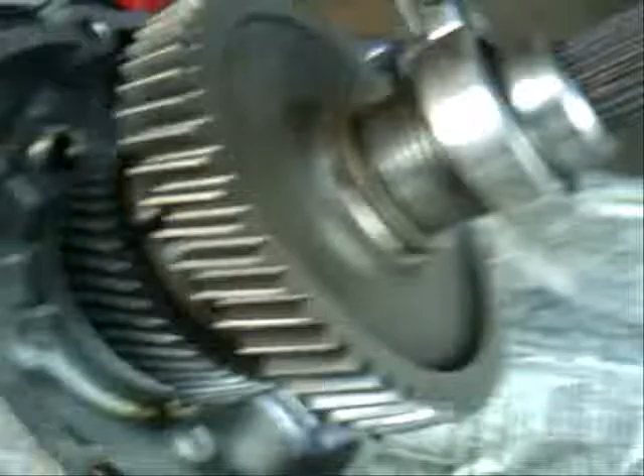Okay, I'm going to show you how I install the shafts, 3 sets of gear shafts here, with the Calmini 416 gears. Calmini, there's a little how-to here. I got it from the guy on eBay. He sent this, and this is their how-to, yada yada yada.

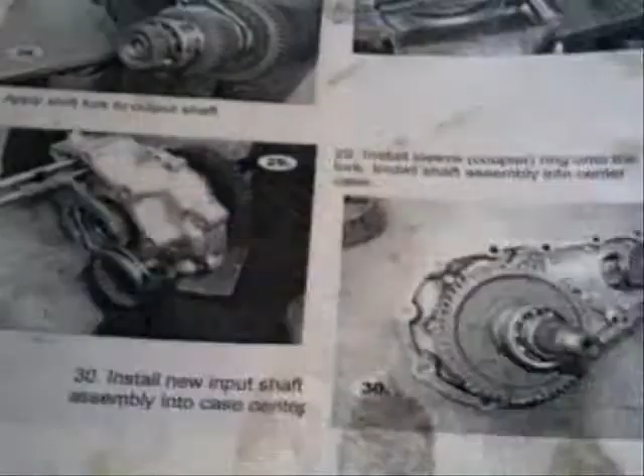And what they want you to do is, when you got everything put together and you're going to install the shafts, they want you to install the main shaft first, then the input shaft, then the middle gear shaft.

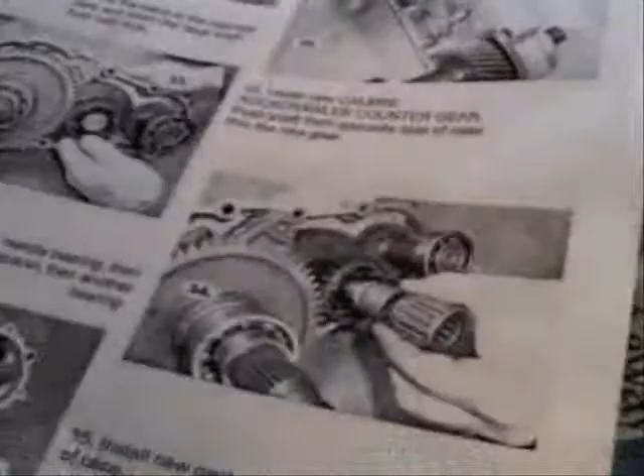Now that is not how I do it, because I'm different like that. Their way may be easier, I don't know, I didn't try it, because I don't read instructions all the time. So anyways, I install it with the main shaft, the middle shaft already pushed in and installed. In both ways, their way and my way, you gotta install the main shaft first.

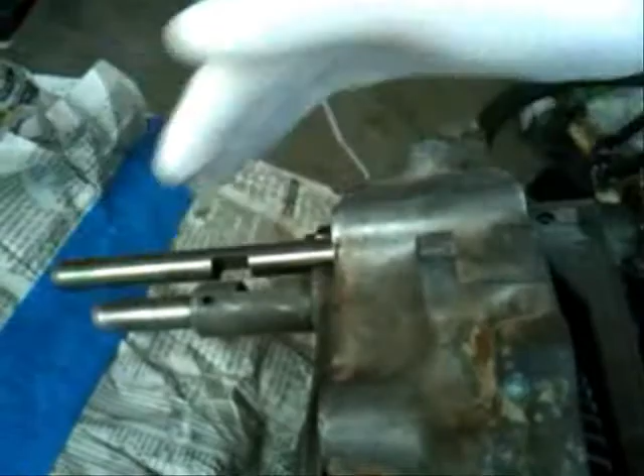Now before you can install it, you want to go ahead and put the high-low selector, slide it on there. So before you slide this whole thing in, you'll have to have the selector on. Of course, this will be in its hole before the bearing even comes close to touching.

So as you're sliding this in, you want to be careful not to grind this, make sure it's going in easy. It's not going to come off as you're sliding that in. You have to grow a third arm, kind of, and you got to put this gear selector ring back on

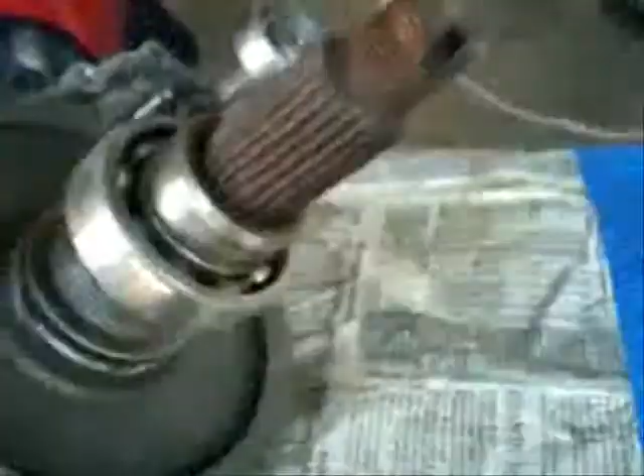the shifter teeth. And as you hold it, you have to rock it back and forth so it clears the teeth. So as you're pushing it in, make sure it goes on straight, it's not grinding anything. You gotta rotate this, and once it pops in, it'll just fall down. And of course it stops because you have that ring on that bearing. And that's it. Okay, so the main shaft's in with the second selector.

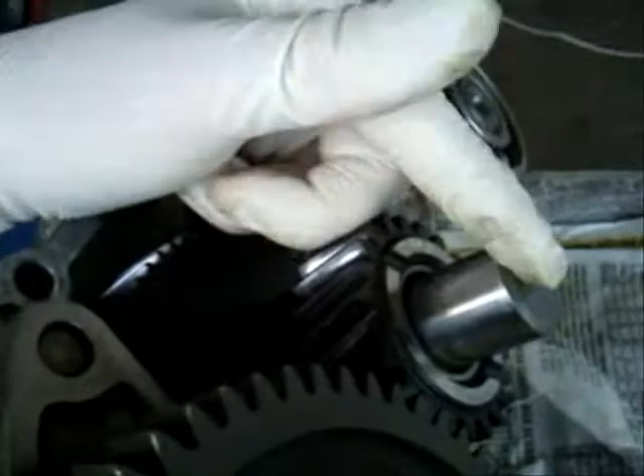And what I do is I install the middle gear next. As I said, I already have this bolted down. As you can see, the high gear on the middle shaft is too big to slide down. So what I do is I pull up on this, and as long as you don't pull past that to make it fall off, you're fine.

So the final shaft, I noticed with the stock gears, it would just fall right in. I didn't have to move anything. Well, with these Calmini gears, it's like it's kind of pushed out farther. It's not, but, of course, okay. See how it won't come out? Now the stock gear, it just fell right out.

So what I did was, let me push that back in, I raised the middle gear a little, and it just comes right out for some strange reason. So when you're putting it in, raise that middle gear just a tick, and see how it looks like the bearing won't fit, like it's pushing it. I don't know why it does that, but I guess because of the teeth angle.

And you just kind of pull up on it. And of course I'm doing this with one hand, so bear with me.

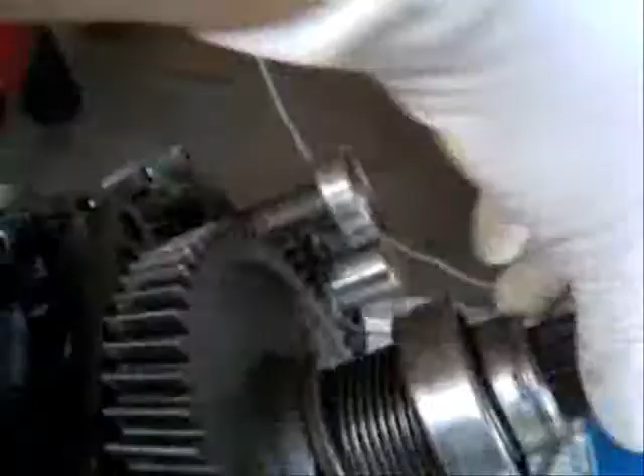And it slides in, and everything's happy. So we got 3 shafts in here. And that's it. And if you want to just test it out by hand, just lube everything up, even the gear teeth, lube them up. And of course, it's touching right there.

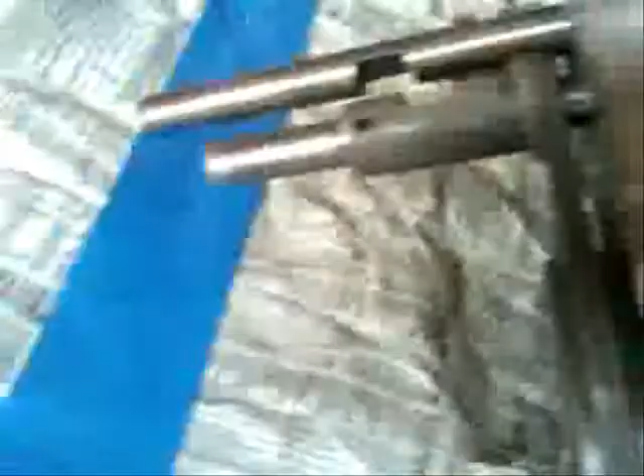So right now, we are in high gear, because of course there's nothing holding that up. So you can test your little high gear out, yada yada, everything moves. Of course these are still moving too. Okay, and moves pretty easy. Okay, there we go. Kind of tilts it up. Hold it with one hand. Move it. Moves pretty easy.

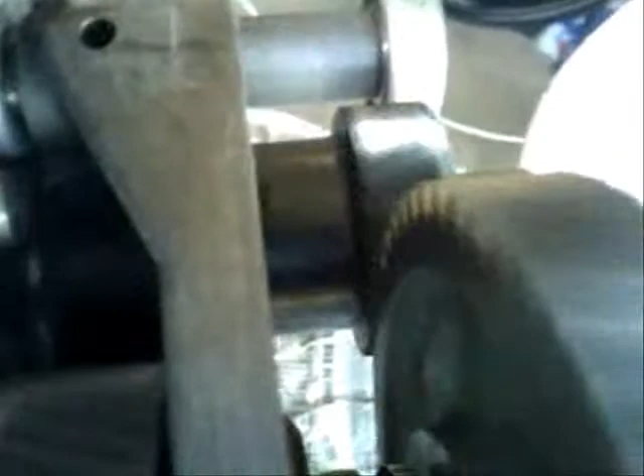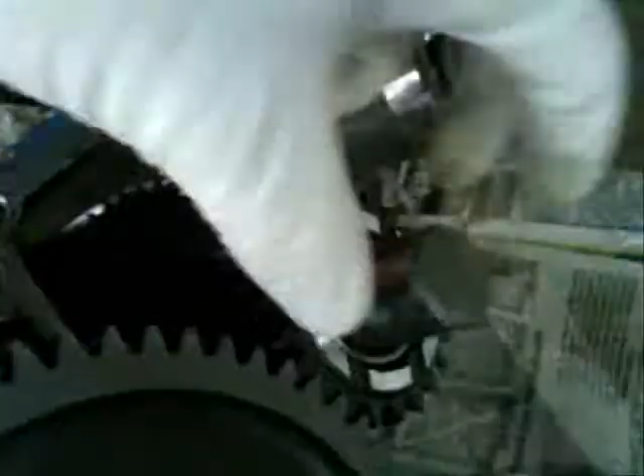Anyway, that's it. And what you want to do next is, of course, put the crush washer down first, then the one needle bearing spacer, then the other needle bearing, as you can see. And then you get the second crush washer, and you put a little grease right there, and you stick it, and just so you know, once you unstick the thing, the brass looking part always goes toward the gear on both ends.

There's a crimped part there, as you can see, it's crimped out, and it lines up with the little groove. This happens on the other casing. And once you get that bad boy nice and centered up as best as you can, you just grab this casing and you just slide it on there. And you can look, make sure everything's falling down in one piece. And once it hits, it'll just pop right on, so it's all good.

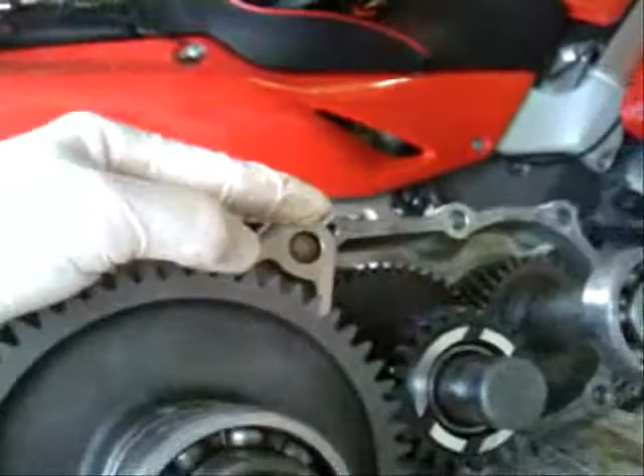But that is our setup. See, everything just works great. Low gear action.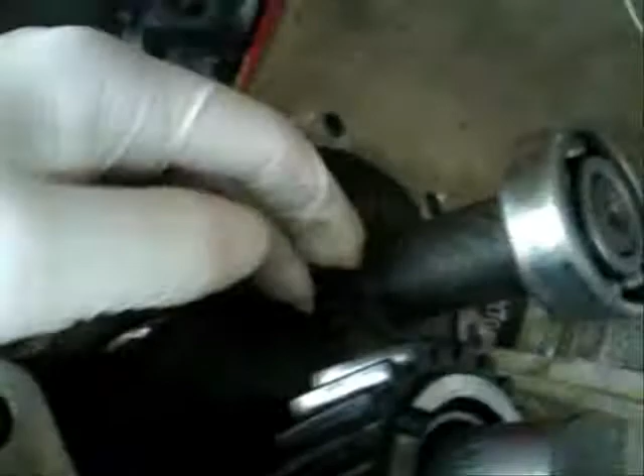This kit came with a new high gear, new low gear, and new middle gears. And it came with a new output shaft, which, like I said, I don't know if that's because there's a different teeth count. I don't know. I'll count it. Just haven't gotten to it.

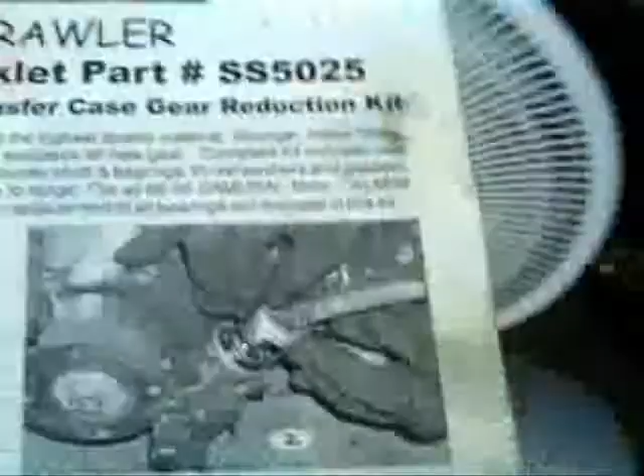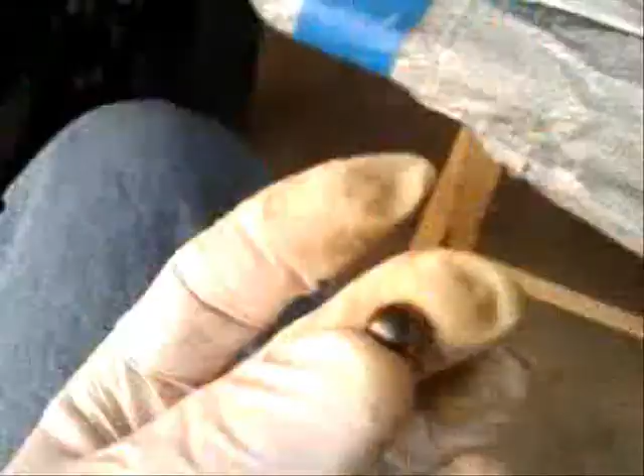And that looks about it. And also, which I never took notice of, I didn't mention anything about the four-wheel drive idiot light. When you're first taking it apart, you take that out, and there's a big detent and ball. It's just like the one we took off from the shifter, but it's bigger, so you can't really mix and match them. So if you're afraid you're going to do it, just put it in a Ziploc bag or a magnet holder.

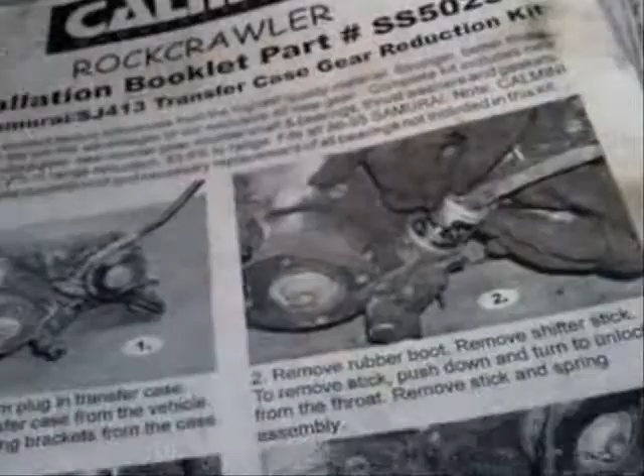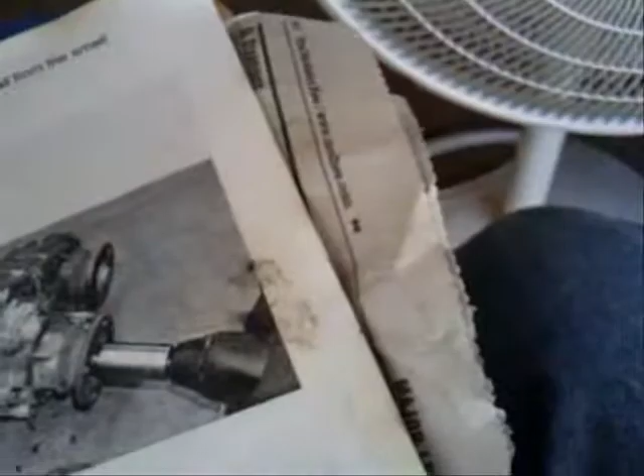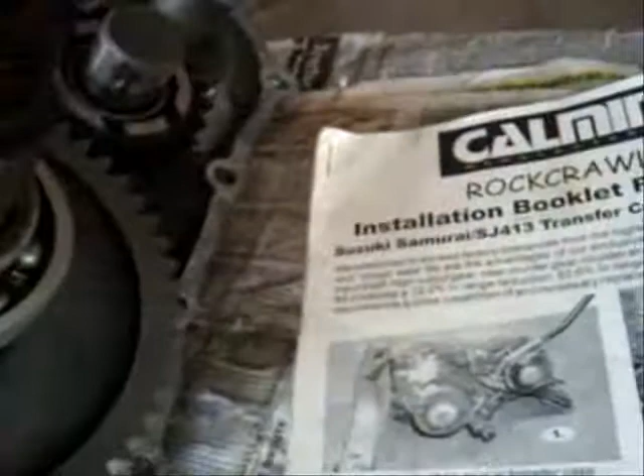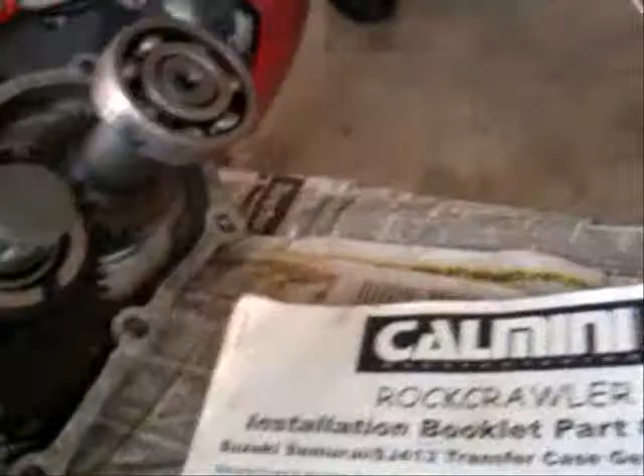Make sure you place your shifter seat with its brass. Once you get it bolted down and the front part on, screw your flanges on. It is a 27mm with that nut. Make sure you uncrimp it. It's kind of a hardened nut, I guess. Use a flat blade, or it says use a point punch. No, I don't have a point punch, so I use a screwdriver.

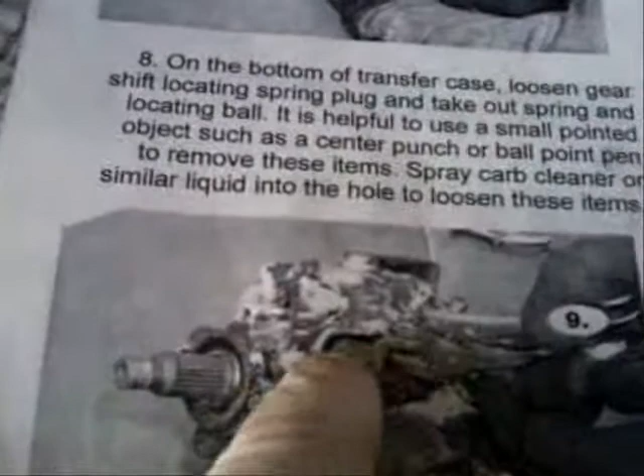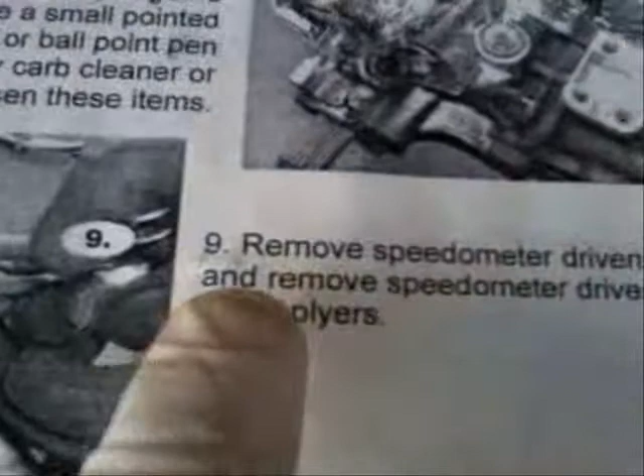And another thing to remove before you install it is, obviously, the speedo cable and that gear. The speedo driven gear case: unbolt and remove the speedo driven gear. Okay, so that'll come out. That has two O-rings on it, so you'll probably need to replace those too.